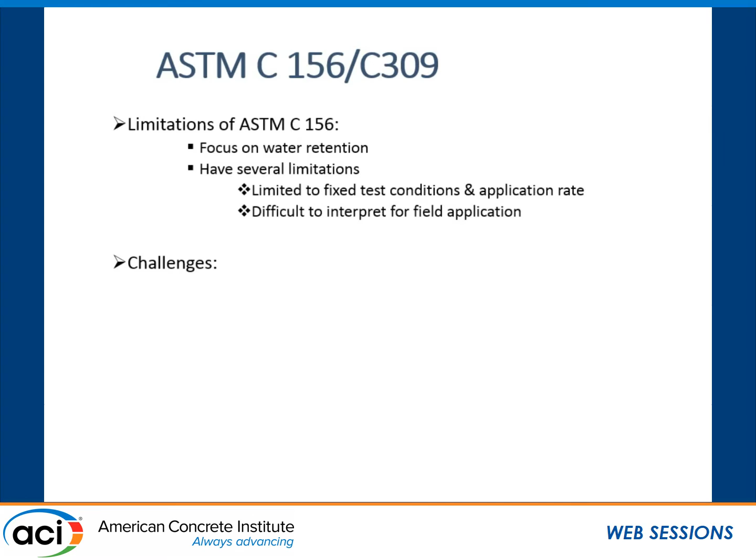First, just to point out that the current ASTM is really focused on moisture loss, and of course there's several limitations associated with that. Trying to translate the rate of loss and so forth under field conditions is not an easy thing. Also, when we have new technologies coming on board, how do we evaluate those and make use of them and effectively employ them under construction? And then finally, if we're going to try to measure curing quality, how do we define it? That could be another interesting topic.

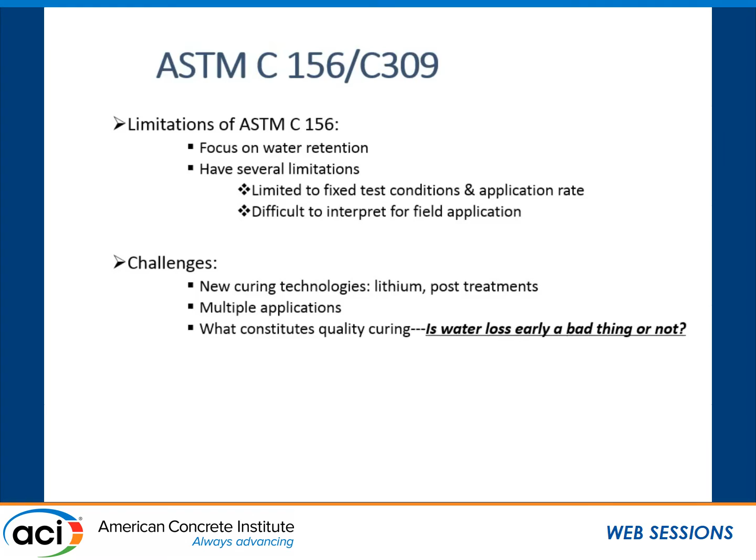There's also the time and rate of curing. Hardly ever discuss that, but I found it to be a very key factor, particularly on performance. It's not just concrete strength, but other performance issues associated with that. The duration of curing and the set gradient - I'll point out why that's important and why I think curing is affecting this. And trying to represent all these factors in terms of total moisture loss, I think, is a very difficult thing to do.

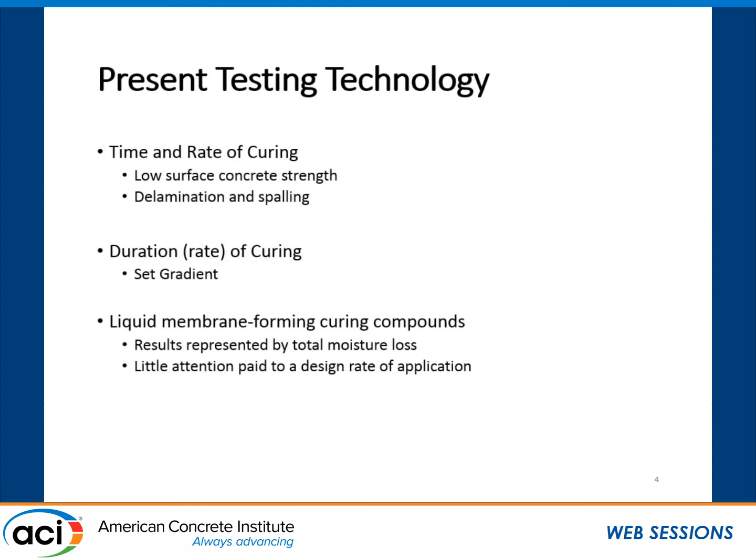We look at the construction methodologies and how do we control equipment. Somebody's making a decision there on what kind of pressure, what kind of rate the equipment's going to move, and how quickly it's going to place a curing compound. As a specifier, do we just copy the ASTM and put that in there? Does that work? I've seen that done, and it's not particularly effective.

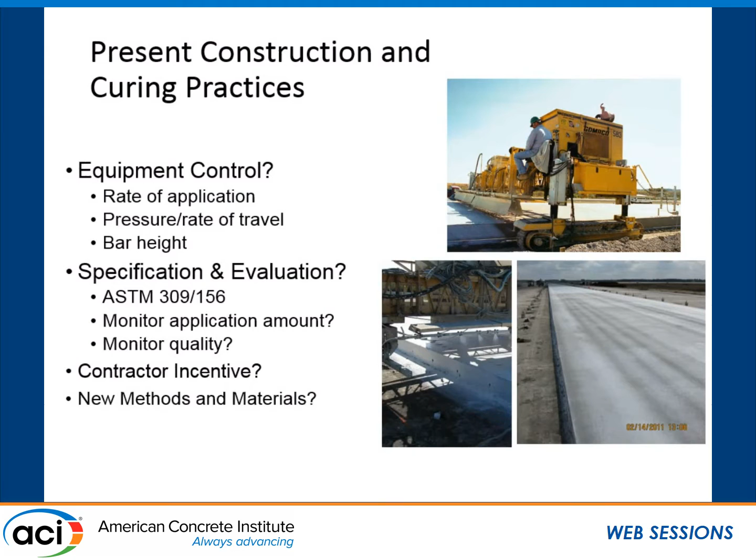Do we just monitor how much is put down? And can we do that? There's industries that have ways of checking that. And then, what about the contractor's motivation? What of the idea of paying the contractor to actually do this? These are some things that I think we need to start thinking about, especially with new methods and materials.

We've got the old methods that we've known about for years. Again, how is the best way to employ them and to check the quality that we get? And a lot of times it shows up in the end product. One issue here is two lift placements. That's a huge issue - someone mentioned the RCC. A big problem in RCC is getting the two layers to bond together, and I think it has a lot to do with the curing.

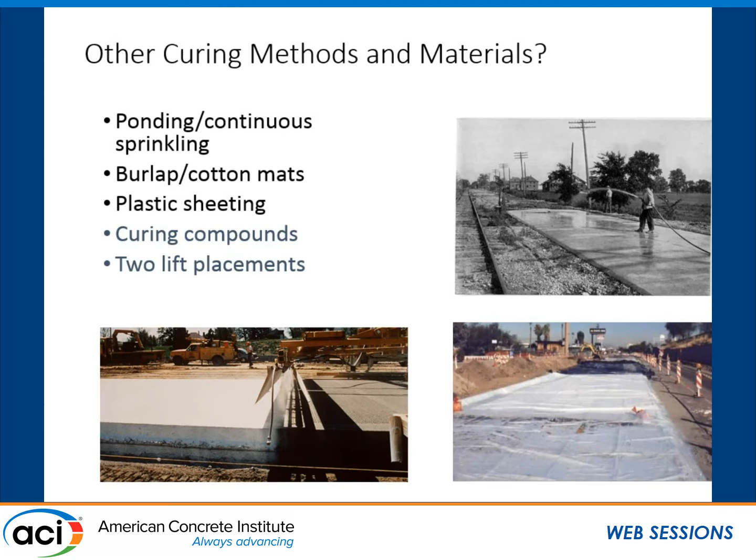But I've asked this question before: why cure? And to me it's, why should we monitor? Okay, yes, strength is always a key thing, but I think it's more than that now. And one example here is this problem.

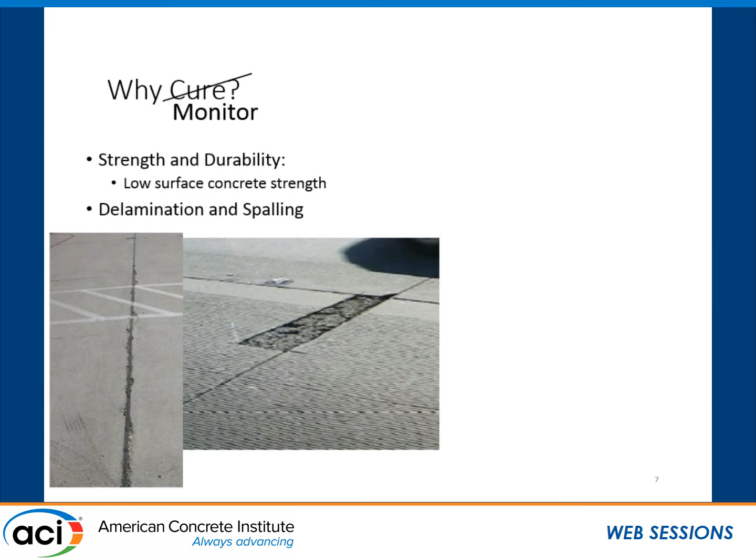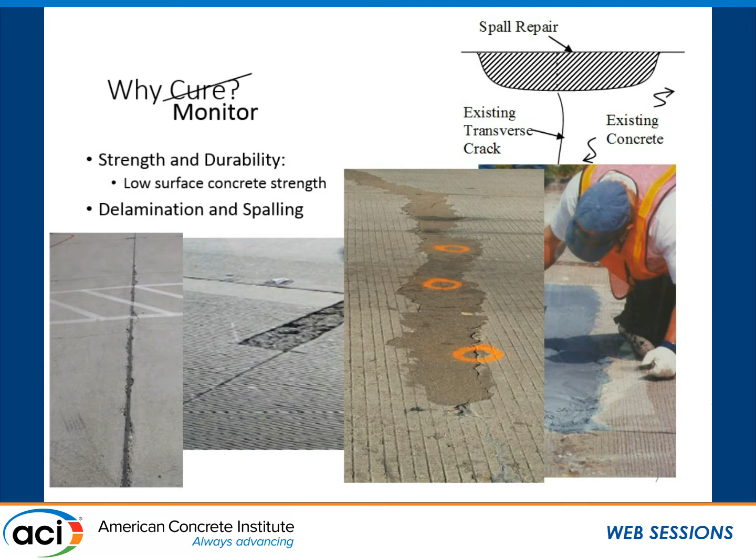This is spalling. This, of course, is a very shallow type of distress, but the method of repair is usually some material that's got to bridge a crack, of all things, which is difficult enough to do, but the placing is pretty intensive, not to mention the cost of the material. And then the problem is that they're not lasting any longer than conventional methods are. So, what can we do in that regard?

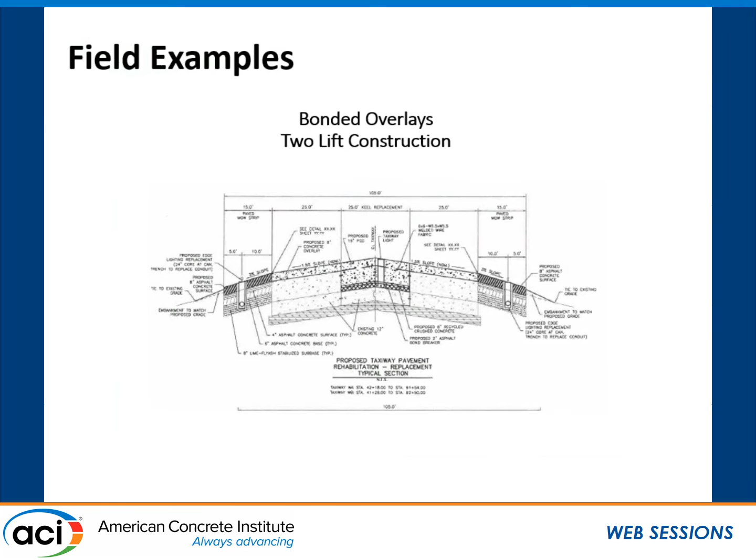That's another one. But curing involves moisture, temperature, and time. Again, one of the real challenges is how do we place bonded overlays and get them to bond? Or how do we do the same thing in two-lift construction?

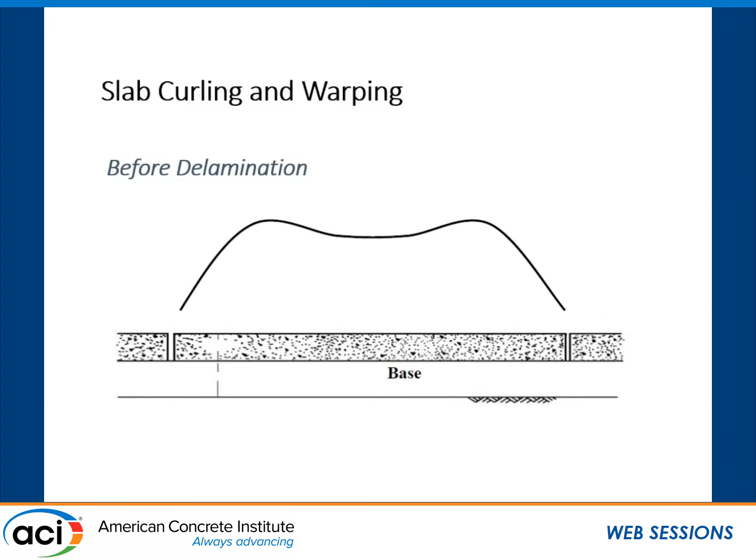Recently, I've really seen a lot of issues here, and what we're dealing with is a stress pattern that's developing in the top layer. This is a very interesting pattern. It's difficult to deal with, and if we don't bond it, then we're going to get a lift-off there. And that can get ugly too.

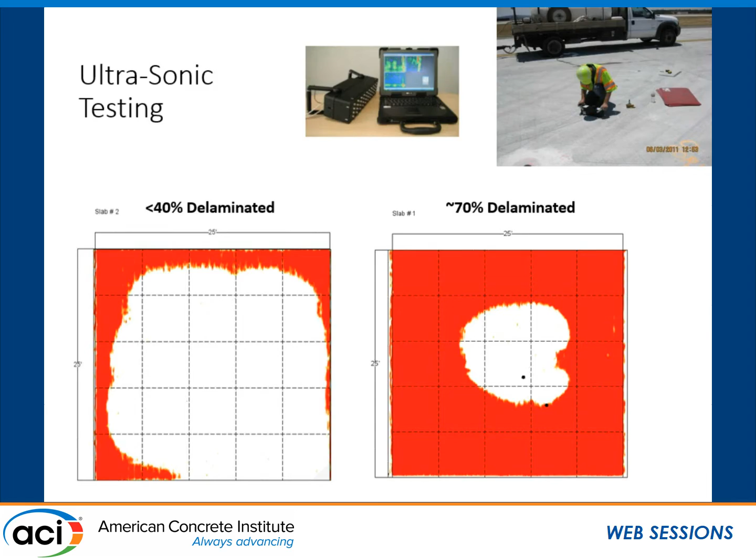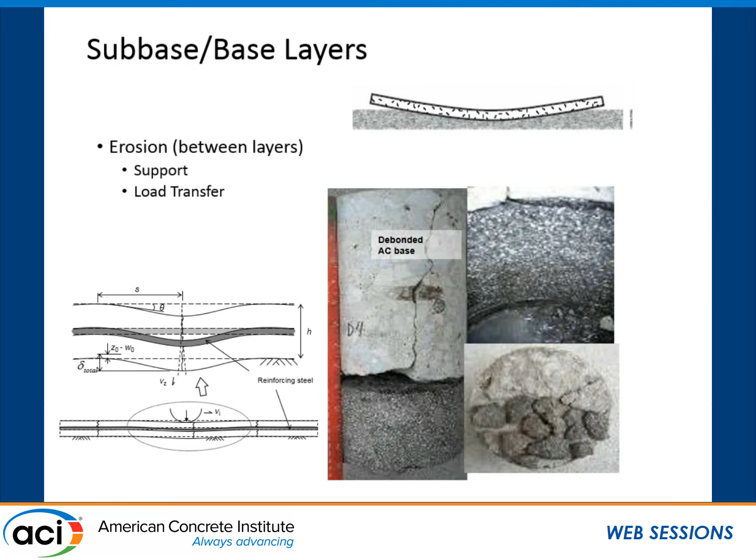If we can figure out, and again, I believe this is the set curl here, or the set gradient is affected by the cure that's affecting this here. I've seen some pavement sections that don't do that, and they perform pretty darn well. There's a need to understand how we're curing and what to do to better employ it to get better performance.

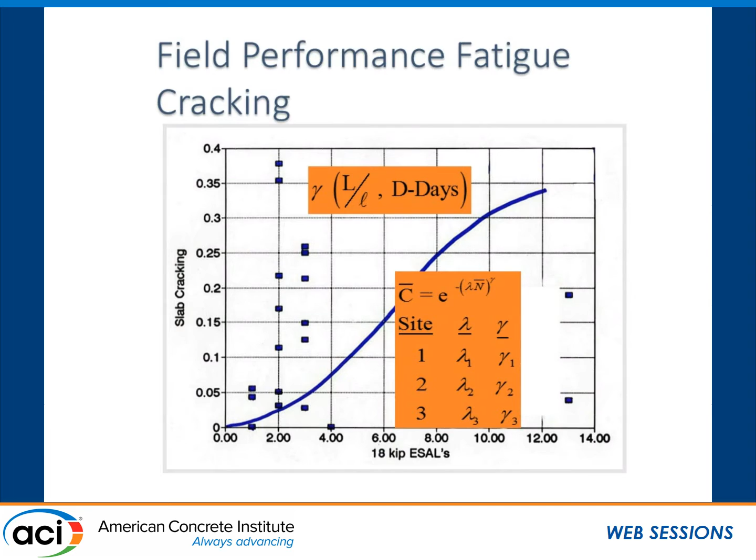But evaporation factors, we're all familiar with this: wind speed, temperature, and relative humidity. These all have a play, and I've looked at performance data for many years. I've spent a lifetime studying that for concrete pavements, and it's inevitably a cloud of data here. It almost has no trend. Here, we're the design engineer, and we're trying to fit our performance curve in that. It hasn't always worked out well, and still, at one point, I started looking at environmental effects.

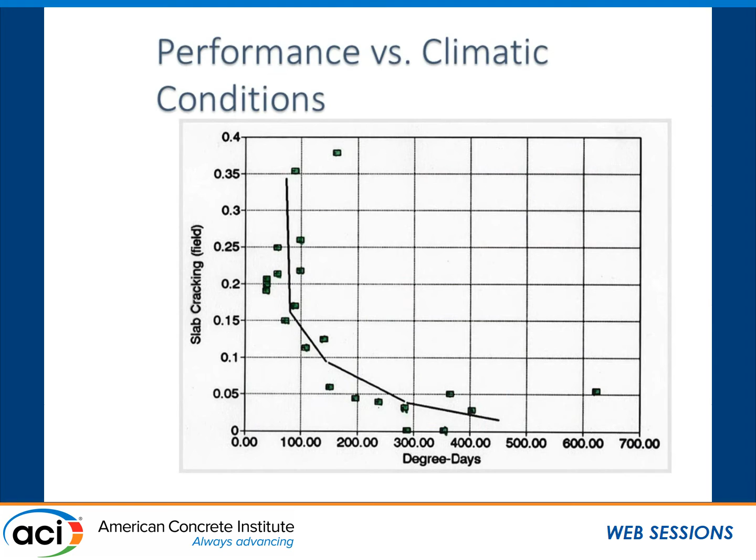I did the best I could to get degree day data on the constructed project, but it was interesting how that mass of data started to fit a pattern. It's a real testament, and I believe it's curing here. That is one of the big things here that we're seeing in this.

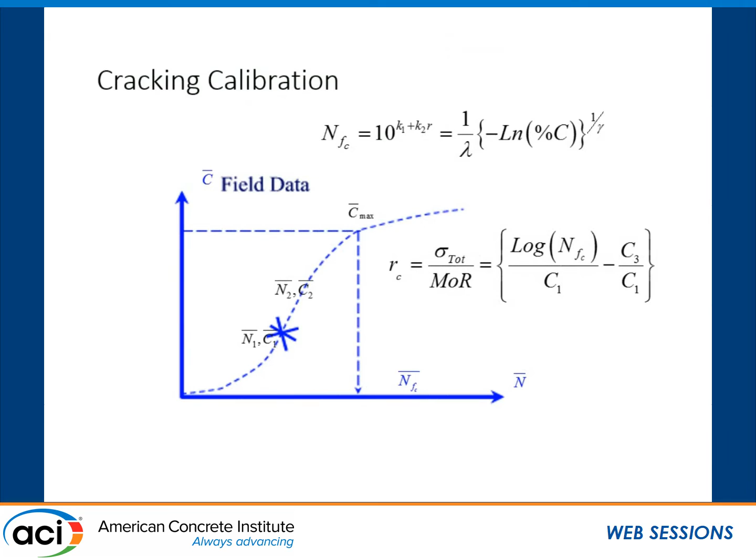So from a pavement point of view, we want to know how to predict the life. The very key part of that is that little factor right there, that R factor. That's a stress ratio, and it's the stress in the concrete divided by its strength. Well, that stress is often made up, and it is in most design procedures, of the stress due to loading. That's the mechanical loading. And then we have this environmental part here that comes in.

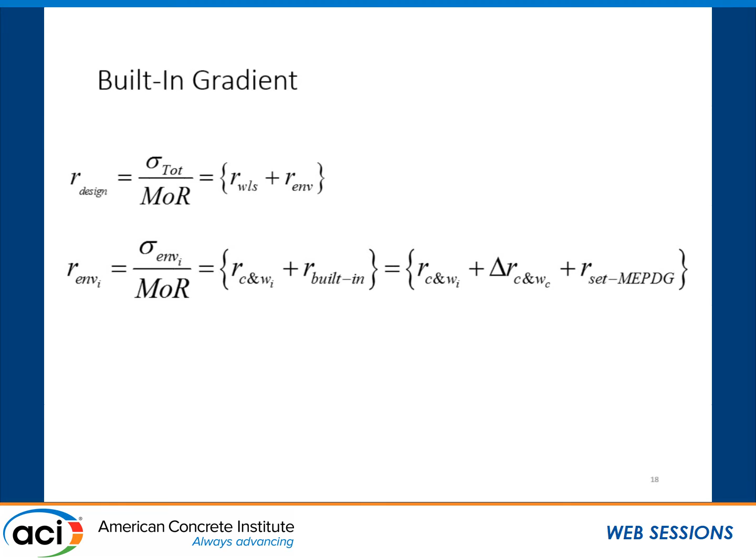We're doing this in the MEPDG, and it's in two pieces. We've got the curling and warping part here, that's where the slab's moving and lifting off and settling down. Then we have the built-in part. I think that's directly a curing effect there. We're seeing it in mechanistic methods of design now. We're not sure what to do with it, but I think there's a role here.

In some of the simulation studies we've done of curing, which is something I've been involved with as well, I'm finding that the set gradient is changing throughout the day. It changes with time. It's not constant because our weather conditions aren't that way. So what do we do? Can we adjust for that? That's really what the question gets down to.

And to get to that, we're going to have to monitor and manage. Now, here's the interesting thing. You can show this to yourself in the MEPDG, but we don't want a zero gradient, by the way. We want a little bit of pre-stress that's built into it. So we're not looking just to zero it out. We want to control it.

We found that if we have a little bit of gradient, we can lengthen the life of the pavement. We can cut the design thickness down. So very interesting situation here.

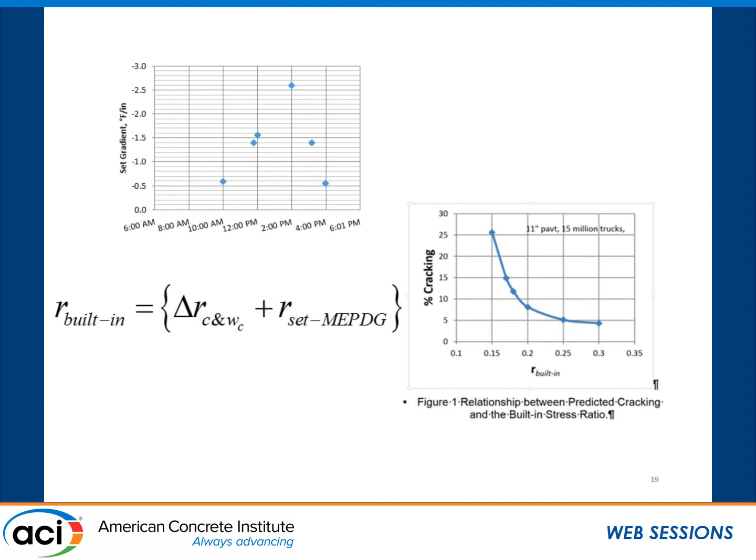So looking at the effect of curing on set, I think that's some area that we need to start looking at and getting into, seeing how the method of curing can benefit us and affect the way the set gradients are forming. There's all kinds of weather conditions out there that we're paving under that affect what that set will be. It's beginning to get a lot of attention, I think.

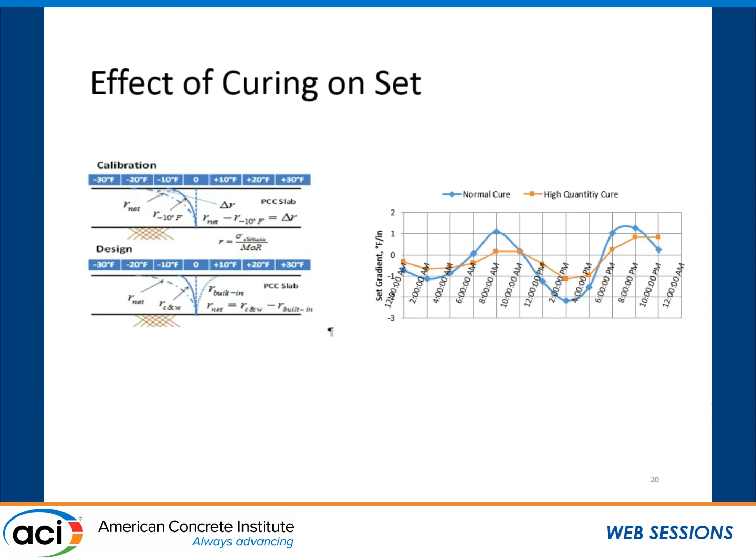All right, so the new approach here, just to go through some of the detail here, we're using a miniature weather station.

Actually, it's a miniature maturity meter. So it's measuring everything that you need for maturity plus the moisture, and we're doing that basically with chilled mirror sensor technology. Very expensive, but very accurate, very repeatable. I've used it for many years and done quite well with it.

But we can get the humidity out of the information we get from the sensor. We use that in a couple different ways. We're recording the humidity in two chambers, and this is a base plate that you see right here, actually divided into two separate chambers that are isolated from each other. This one is sealed, this one is filtered. So the effect of the curing is represented inside that chamber there that the sensor is monitoring.

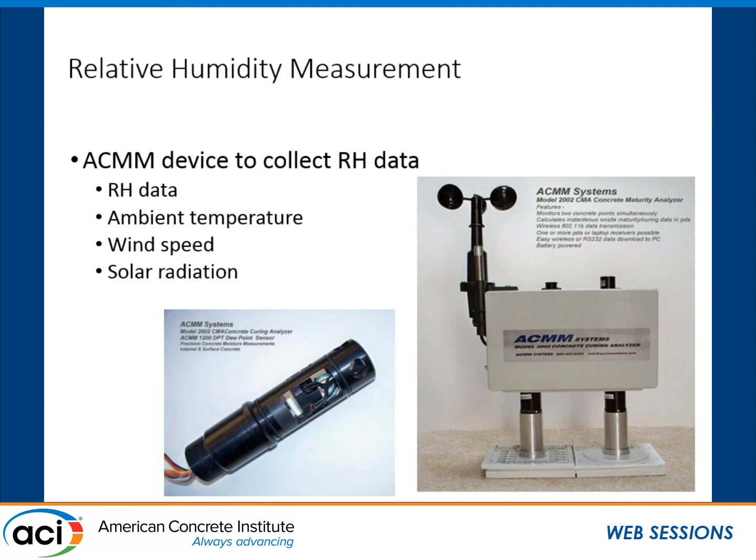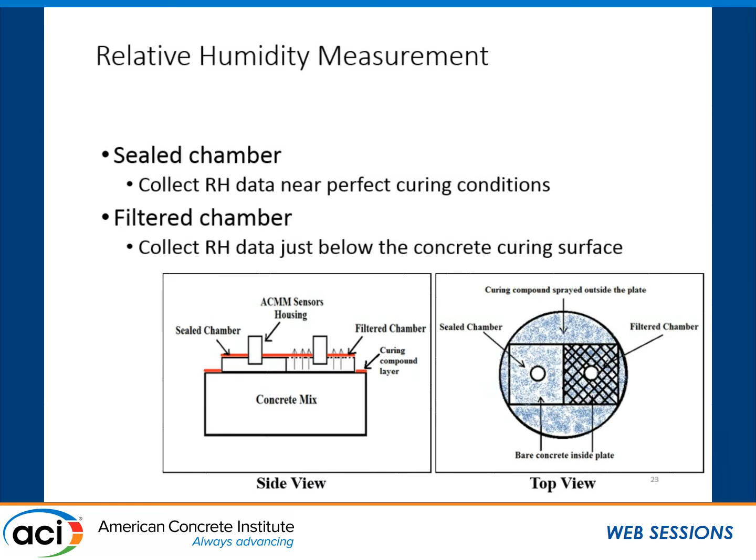So we're picking up relative humidity in two very different conditions. One is sealed here, the other one has a curing membrane over it, which is protecting it to the extent that it can from the ambient condition.

Here's a close-up, the way we do it in the field. Here you can see the top of the base plate again. This is a wire mesh. I just use a mortar, a very thin mortar, as part of the filter. And this, of course, supports whatever curing technology I want to use for the most part. I can put clear curing compounds on, or pigmented, or whatever on that, and it worked out very well.

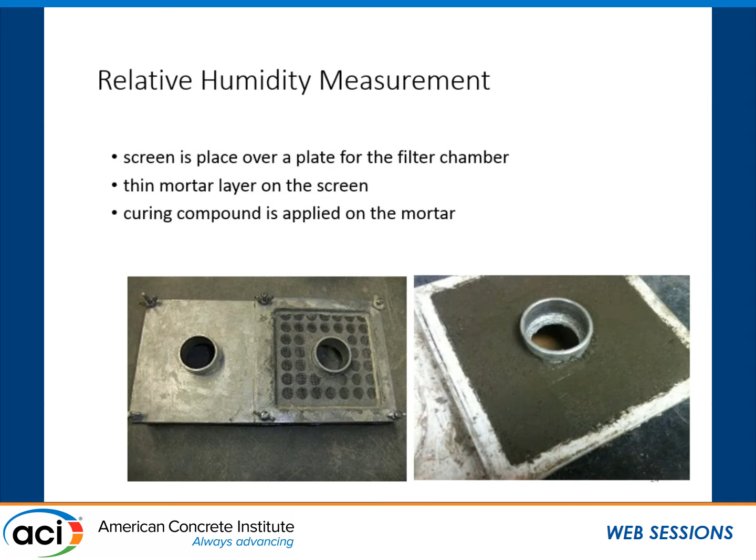So these are the monitoring ports here where we put the sensor in. Now we can do this in the field or in the lab, and that's a good thing about this protocol. It bridges the field and the laboratory condition.

The technicians can prepare the top of the plate, lay it on the surface of the concrete, get it ready for spraying. So the spray machine comes over and sprays it as it normally would, leaves a bare spot, of course, and that's where we set up the base plate. Here, the curing comes off and sprays over where you have it set up. So this is what it looks like when it's in place.

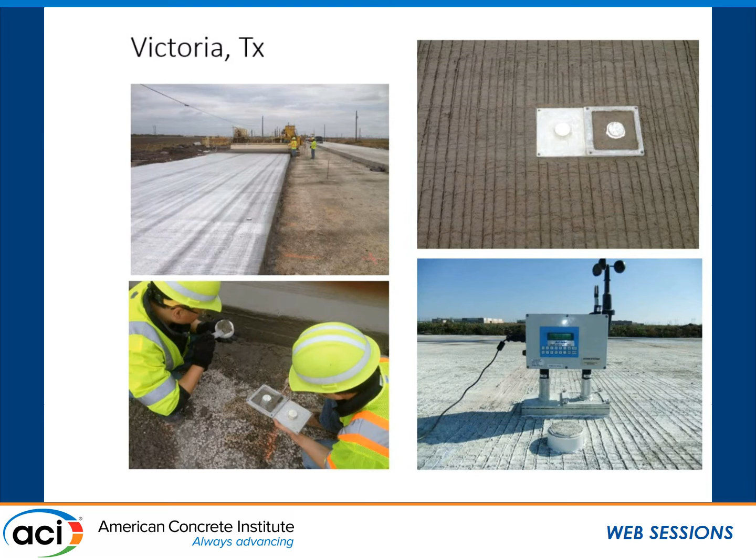And this, again, is measuring weather conditions, but mainly humidity and temperature is what I'm interested in. This I'll talk about in just a little bit, but that's a point to collect dielectric data, and I'll explain that momentarily.

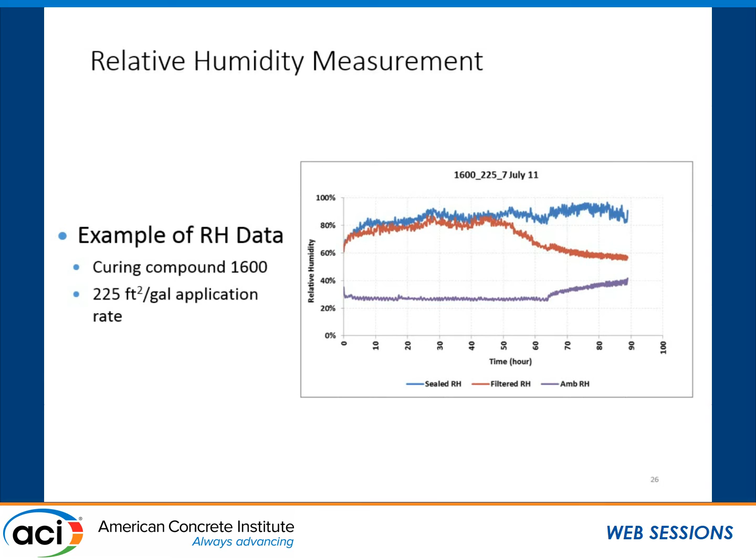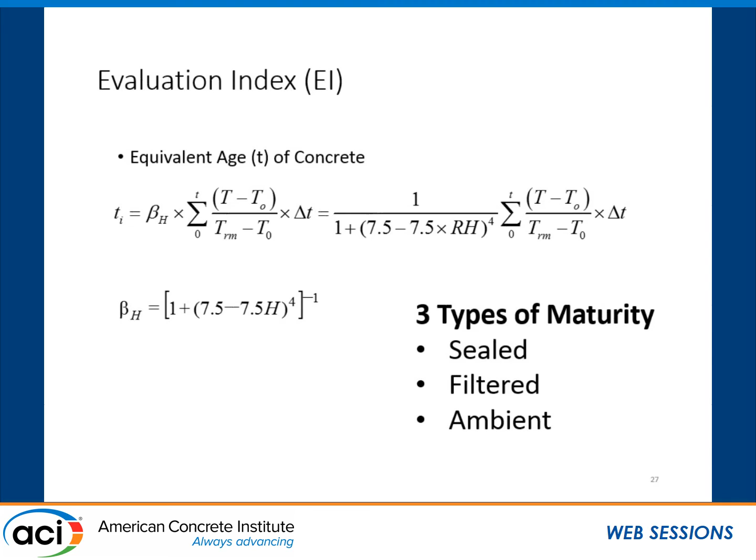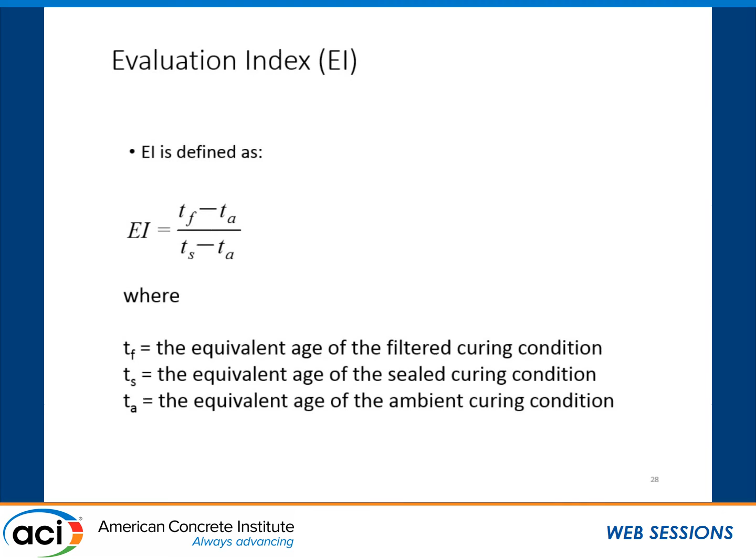I'm calculating a maturity for this now, and I think this is the best use for maturity that I've ever come across. It's early age, and it's done under a sealed, a filtered, and an ambient condition. I get three different maturities from that over time. So this is over the period of time the curing of this is determined. These calculations are used to get a single index that I call the evaluation index. I try to represent the entire condition of the curing through this EI term here.

Now, in my experience, and what I've done with this, you've got to have an EI of at least 80% if you're going to do decent curing. Now, RCC is really open, it's got a very open texture—at least that's what I've traditionally seen.

But nowadays they're changing the way they pave RCC. They're really trying to close the surface up, and I think that's going to be a huge benefit. But why does it separate on two lifts? I've visited enough RCC to know that's a common issue with two-lift paving—trying to keep those layers bonded together. I think it's got a lot to do with just how much drying is going on at the surface.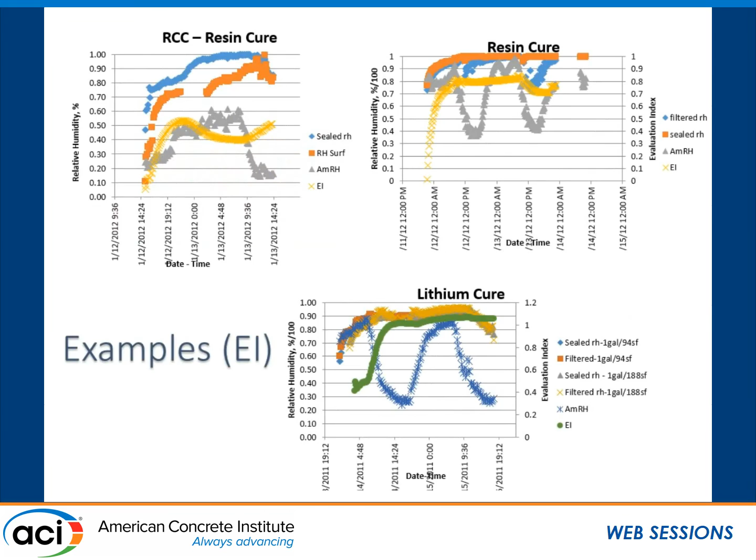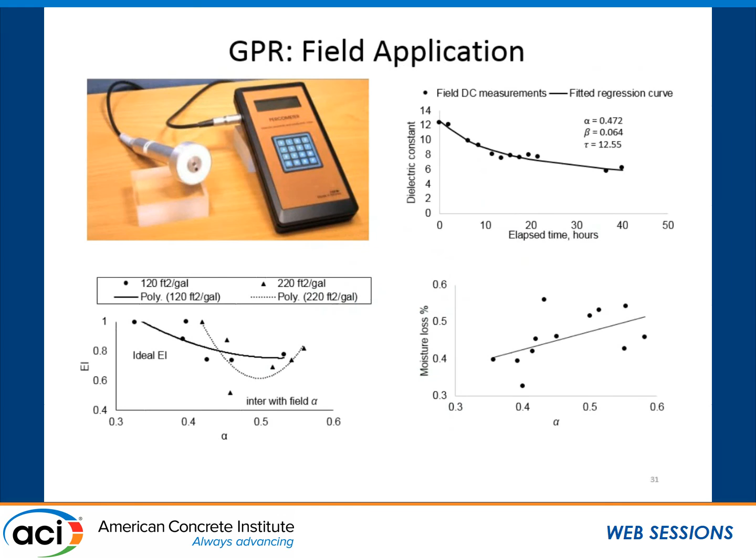But anyway, in our test program, we're looking at trying to build on this database here. We're testing more curing compounds, more curing situations to try and validate what we're finding.

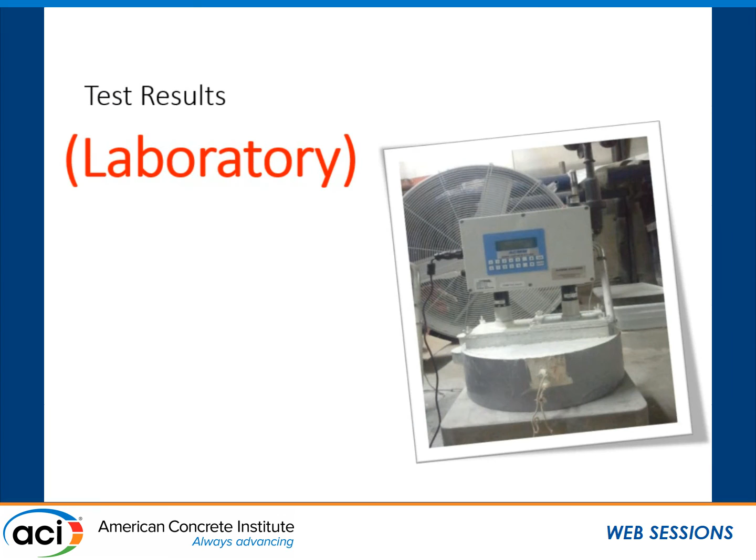So in the lab, we have, here you can see the device, different wind speeds, and we can get the weight loss. We're checking abrasion resistance. We're doing all those kinds of tests to check, again, the quality.

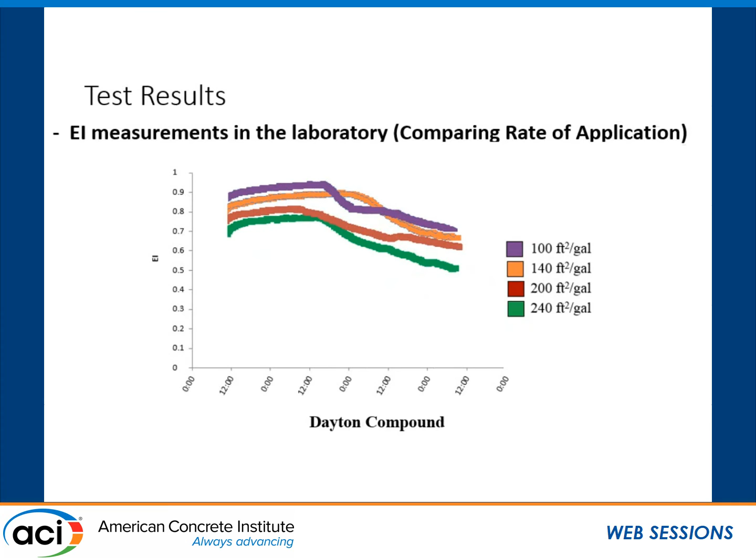Here's another one, and these are two commercially available products. Now, do they look like they're equivalent? No, they're not, but the manufacturers are not telling us that. And I think we need to start recognizing that as well.

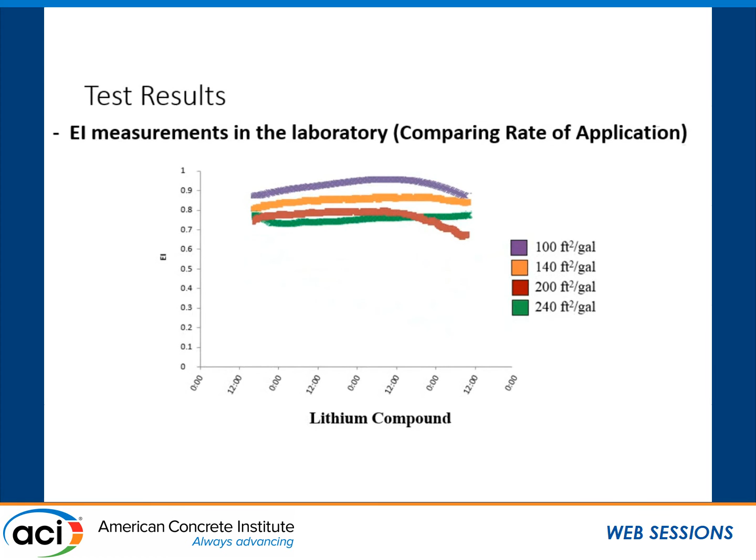Here's another one that held pretty well during the curing. So there's a range here that we're seeing, and we can pick this up under the lab conditions. We've done weight loss tests and moisture loss tests, and then we've done the abrasion tests with it. And we're seeing pretty good results there.

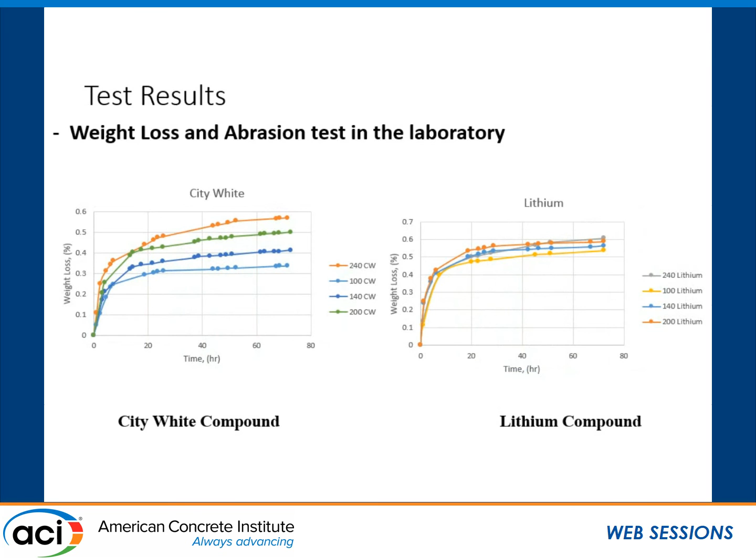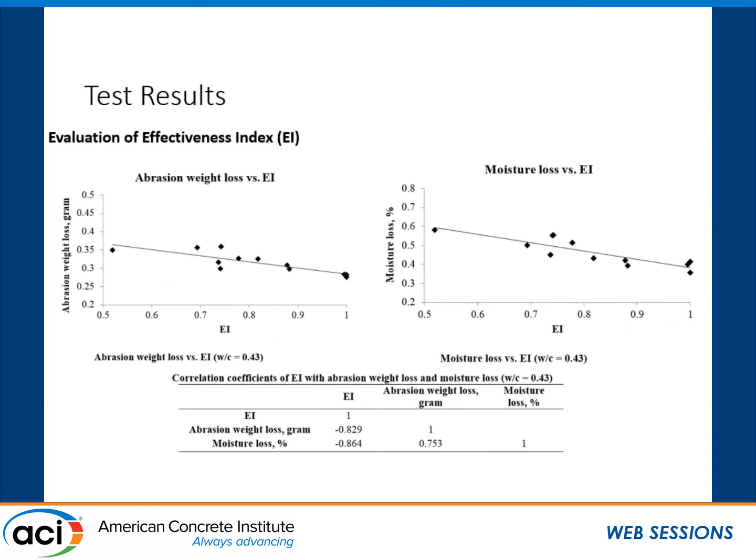We're going to continue to do this. Some of our early data was a little scattered, but as we get more data, we're getting better trends, I think, of abrasion and moisture loss versus the EI. So we're hoping to improve on this as we go. But so far, it looks pretty good.

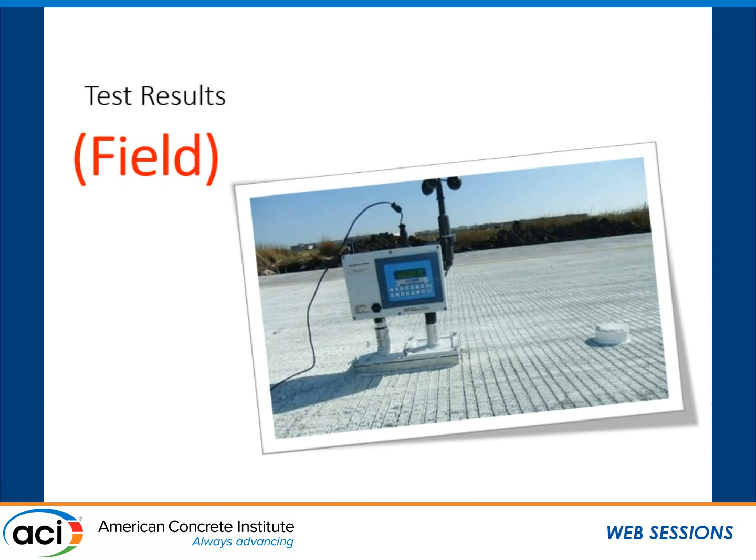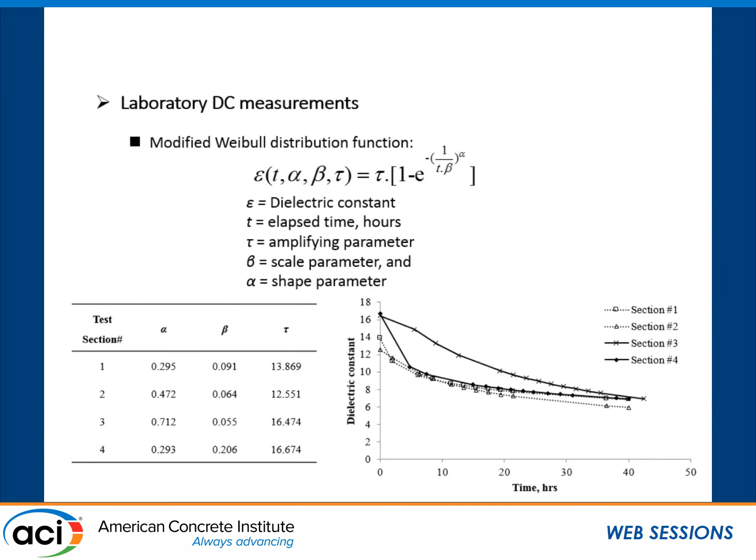Now, from our lab program in the field, where we set up, again, you can see the device here. We're getting in the field the humidity and EI information, plus we're getting the dielectric. And again, this is the trend here. We're fitting that trend with a characteristic mathematical equation to get the slope data. You can see the slope data here. We're looking then to expand on the ability to get the GPR.

Now this is how we're doing this. A lot of research at TTI has been looking at using ground penetrating radar to get densities, moisture contents, what have you. We thought we could use it for curing, and so we had this little cart in the lab. You notice the antennas right here?

And then we've got the computer here that records the data. Now, this is air-launched, and we're shooting through the compound and the concrete now. So we're not using this little protective cylinder that I've used in the past, and so we're looking at how well we can do that.

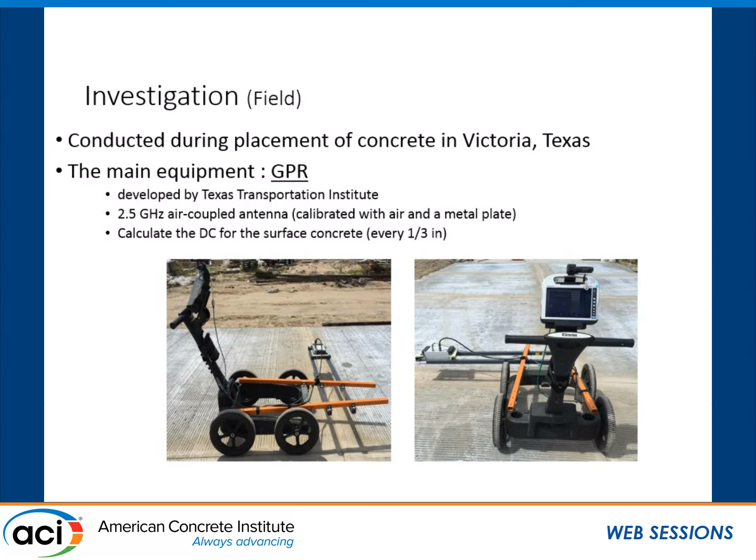Now, we ran the machine down the alignment a few times to see what it would do. I wasn't sure what we'd get, but we got pretty good repeatability here. Here is a trace. Now, there's a couple things to pick up here. Notice, first of all, how jumpy it is.

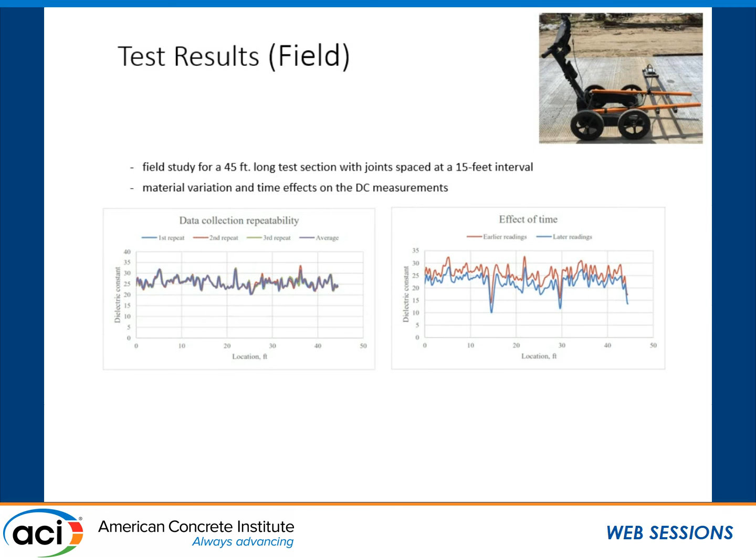I think that's an indication of variability, okay? And I think that would be a good way to spec a job and see a minimum variation there in the trace. Now, we did this three times, and you can see we got really good repeatability with this. I was amazed how we were able to do that. We also checked it at different times. We started seeing the change as the moisture was evaporating from the surface with this.

Here's another shot, and I understand the curing looks bad here, okay? But I didn't care, I was just the innocent observer here, just watching what they do. And so we thought we'd jump in and check it where we could. But look here, they sprayed it twice. It shows up right there on our trace. Otherwise, a lot of variability in there, okay? And this is one thing that we could probably improve on, is getting better consistency.

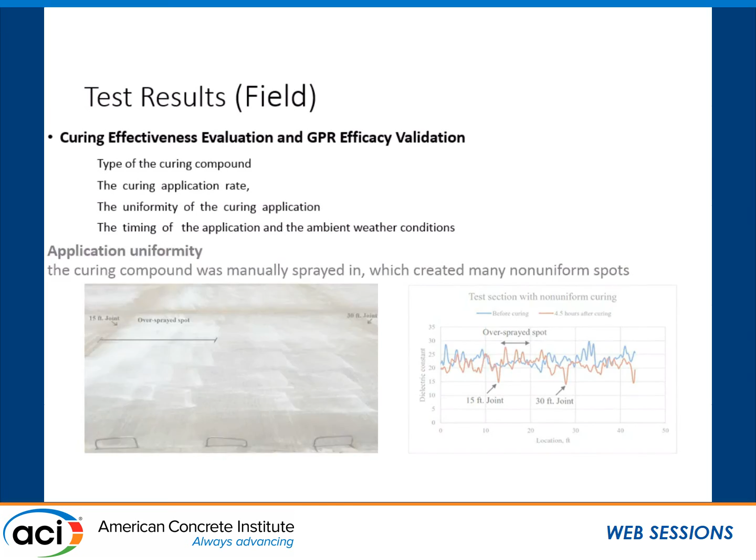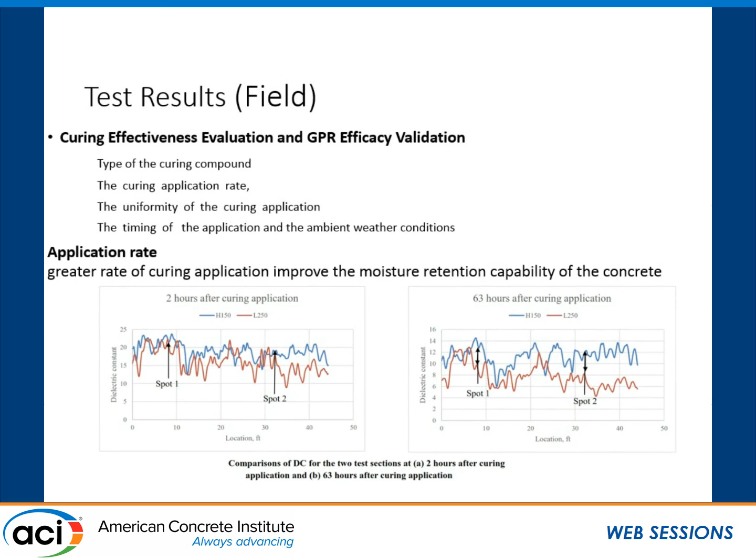Here's another shot, two hours and then 63 hours after placement. We're seeing a steady change there, as we would expect, as you see more water being evaporated from the surface of the concrete. So taking all the data at one position over time, we can get this characteristic slope, okay? And we can use that slope to go back.

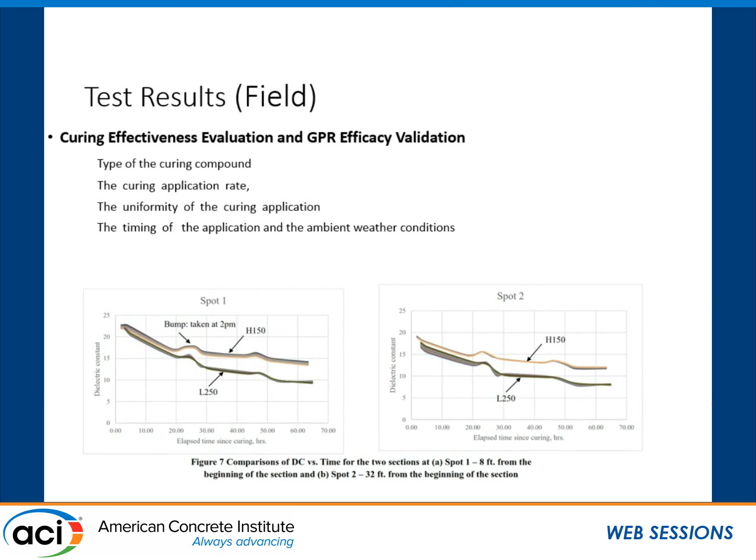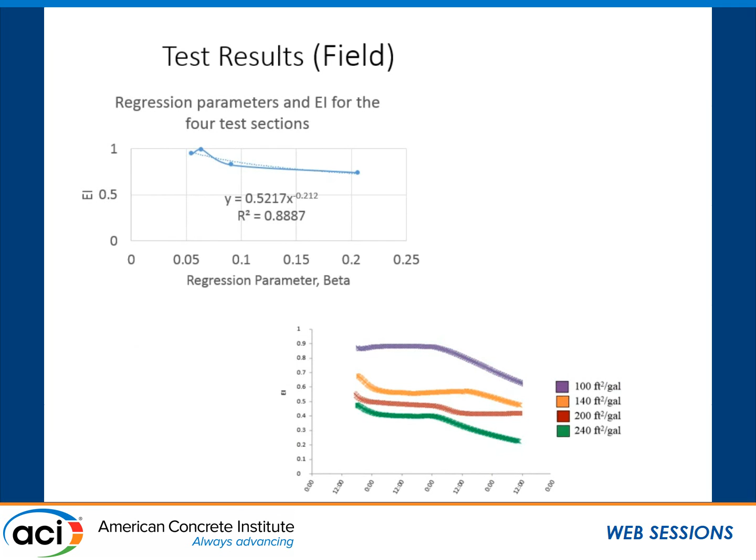This would be the field curve, right? So we measure the EI in the field at a given point, and we use data from all over the site to build up this chart here. And we can take the EI and come in and see what our level of application should be. We can adjust it on the run that way, I think.

This is what I'm anticipating, a new protocol. I think something like this is going to be key to the ability to start managing curing. And I think this is something for the ACI committees to start talking about. What are the protocols to manage curing for a project? I think that'd be an interesting thing to start really discussing and getting into. And then what are the protocols to monitor it and track how the management should be and what the strategy is.

We're using NDT then, and the EI seems to be very practical for field, for lab use, and really importantly for computer simulation. I use it to characterize numerically the interface between the ambient and the concrete material. I think it's a very important thing to be able to do. Besides the temperature effect, we have to be able to account for the moisture and the humidity effect in there.

We have found that the GPR, either with the percometer or with the air launch, is very repeatable, and is sensitive to things like application rate, curing time, and uniformity. I think those are the very key things that we need to be able to pick up.

Lastly, I want to say, I think this system is very amenable for automation and computerization and mechanization, anything you want to call it. Think of the project now. By the way, we're paying the contractor to do the work, right? We're going to pay him. And we're going to control the paving or the curing by GPR and a base station and curing reference curves, all according to the climatic conditions. We're almost 3D printing the pavement here in terms of curing. I think that's where we have to go, and that's what I hope to go in our research project.